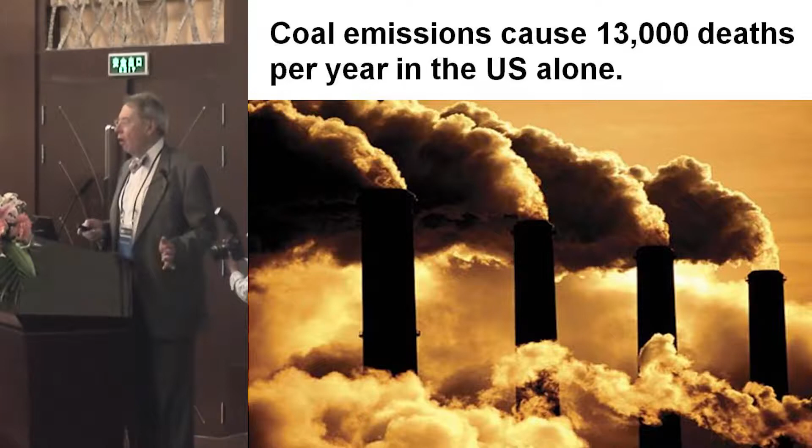First, let's start with coal. The US EPA says coal causes 13,000 deaths a year from respiratory disease caused by inhalation of particles of about 2.5 microns or less. That's in the US alone. In China, over 100,000. The UN estimates in the world, almost 1 million people die from coal particulate emissions.

One of the problems with global warming that I find the worst is the lack of food and water caused by the melting of glaciers. Glaciers normally retain water in winter and release it in summer, but the rivers that are fed by the Rongbuk Glacier are now becoming less able to provide water during the summer. Without water, growing food is next to impossible.

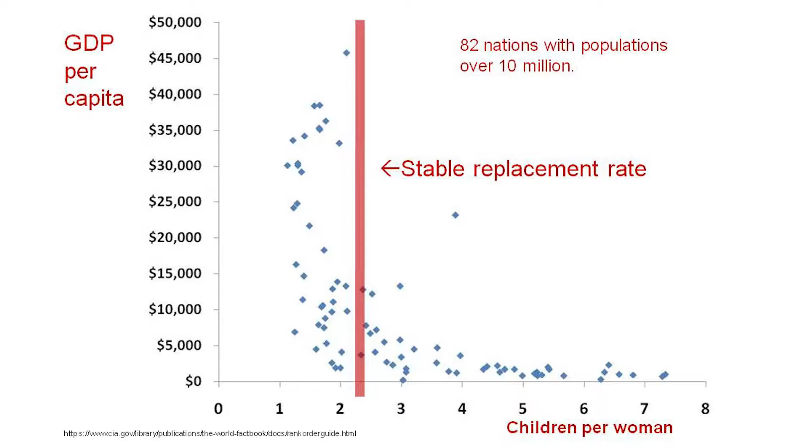Population scientists say about 2.3 children per woman leads to a stable population. And if we just draw that on the graph and look at it, it's the wealthier nations that have a stable or reducing population. The United States birth rate is about equal to that which would cause no growth. US population growth is principally by immigration.

It's pretty clear that somewhere around 2,000 kilowatt hours a year is the break-even point for achieving prosperity using electric power. Now, electric power is not the only way to achieve prosperity. You need education, property rights, rule of law, medicine, and so on.

But electric power is critical to prosperity because it's the type of energy that is necessary for cooling, for heating, for water purification, for sewage processing, for medicine, for communications, for industry, for transportation. All those things depend upon electric power. All the developing nations know this. They wish to increase their energy use.

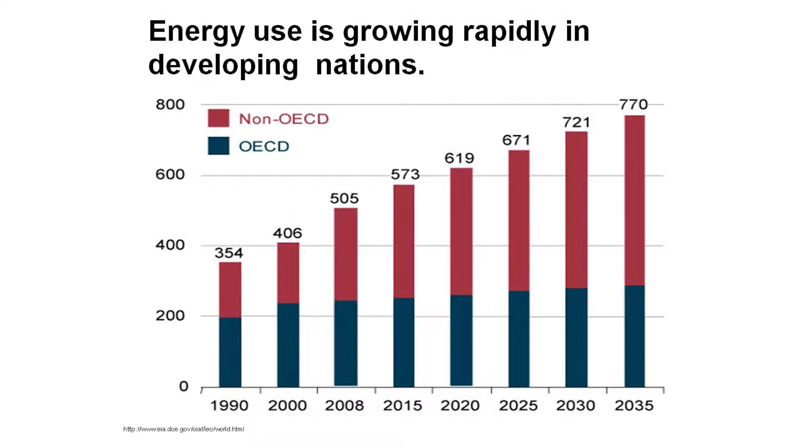And so you see, the non-OECD nations are projected to have the most growth in energy over the next few decades. How are they going to do it? They're going to do it by burning coal, because they don't have money to build $5 billion nuclear power plants. They will use the cheapest energy source available to them because they desperately need that electric power.

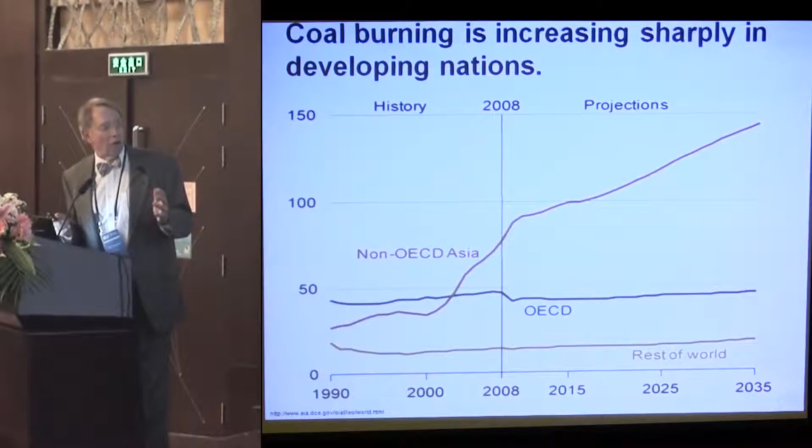Now, carbon taxes. Carbon taxes are not an adequate solution. Here's a man, Jeffrey Sachs, who was the leader of the UN Millennium Development Project. He was also the financial advisor to Poland, to Russia, and so on. He's a well-known economist, and he says taxes aren't enough. We need a new technology. And not only that, we need to have that new technology spread to the whole world rapidly if we're going

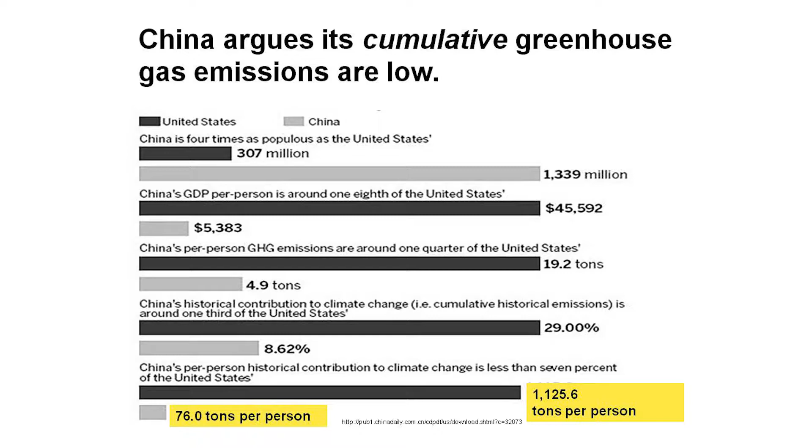And so the developing nations argue that the West gained its prosperity by cheap energy, by burning coal and emitting CO2, so why should the developing nations be denied that right? It's not fair. I'm not trying to make the argument, I'm trying to point out that it's impossible to reach agreement on such a contention.

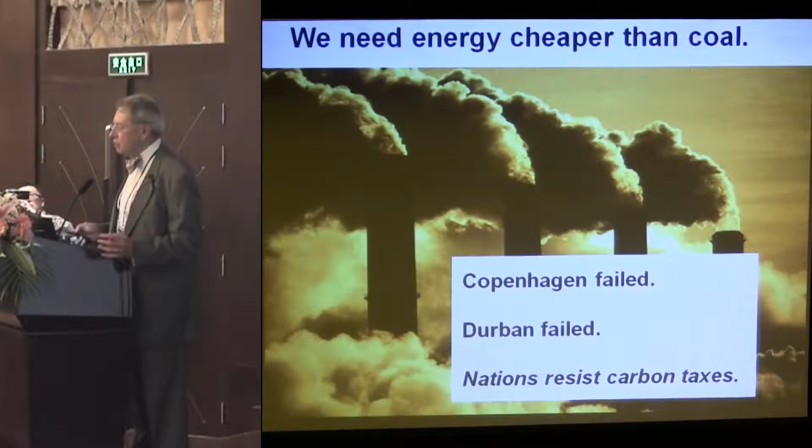So we tried anyhow. We had conferences in Kyoto, in Copenhagen, in Durban. You know, 30,000 people went to the conference in Durban to negotiate a climate treaty. Well, how can 30,000 people agree on anything? How can 7 billion people in 200 nations in the world agree to impose taxes on carbon that is against their individual economic self-interests on behalf of the whole world's stability? It's not going to happen.

So let's look at the cost of electricity from coal and other sources, because there's also a green movement that wants to replace coal. Here's the cost of coal. About $2.8 per watt of generation capacity is the capital cost for coal. In this talk, I use a single model throughout, and I use the financial idea that if you do capital cost recovery at an 8% cost of capital over 40 years, operating a plant 90% of the time, you get 2.8 cents per kilowatt hour. So it's easy to remember, $2.8, 2.8 cents. So that's the capital cost.

The fuel cost for coal is about $45 a ton delivered to the plant. So that adds about 1.8 cents there. So in this model, the cost of coal for a typical US plant is about 5.6 cents per kilowatt hour.

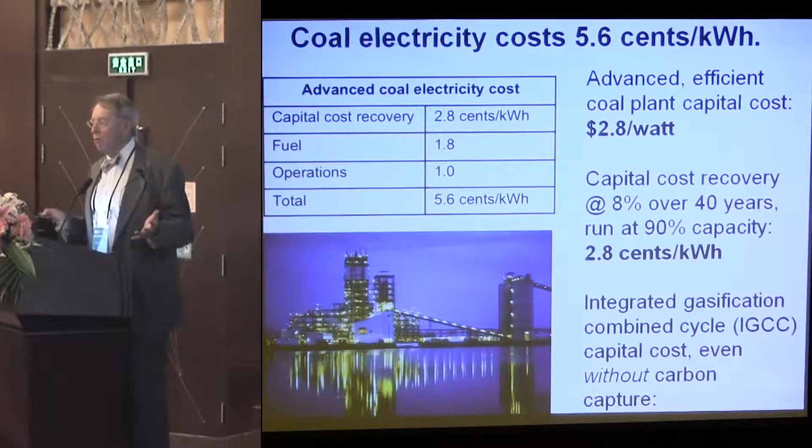Now people are saying, well, we have better technologies like integrated gasification combined cycle plants. These are coal plants that burn coal in oxygen rather than air, so that the effluent is only water and CO2, so the CO2 can be extracted. But only one of these plants has ever been built in the US. That very pretty picture is the one in Florida. And it's expensive.

Natural gas is another interesting energy source. First of all, if you were going to do the best job you could, you would use a combined cycle gas turbine, which has a 60% efficiency of conversion from thermal power to electrical power. Buying such a thing costs about $1 per watt for capital costs. I used fuel costs now at $5 per million BTU to come up with a fuel cost per kilowatt hour of 2.8 cents. Our operations costs are standard in this model, and that comes to about 4.8 cents per kilowatt hour.

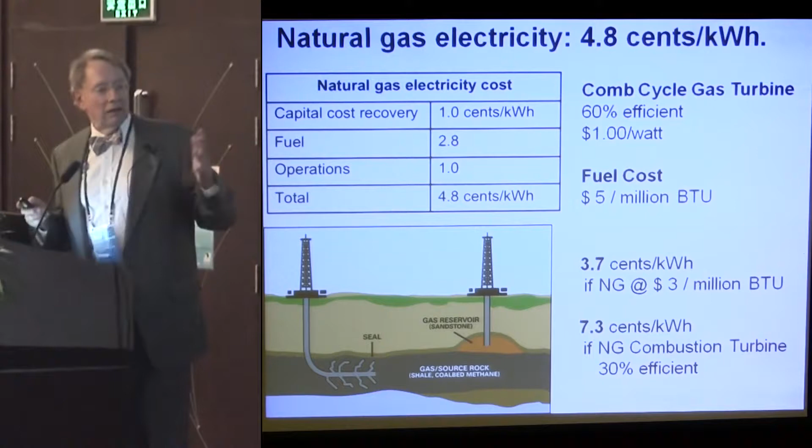Now, on the other hand, the cost of gas right today is a little lower than that. And if that were to persist forever, we could have a low cost of power from natural gas of only 3.7 cents. But actually, we don't use combined cycle gas turbines very much. We only use natural gas combustion turbines. And that would mean it would be about 7 cents. So those are the bogeys we want to deal with.

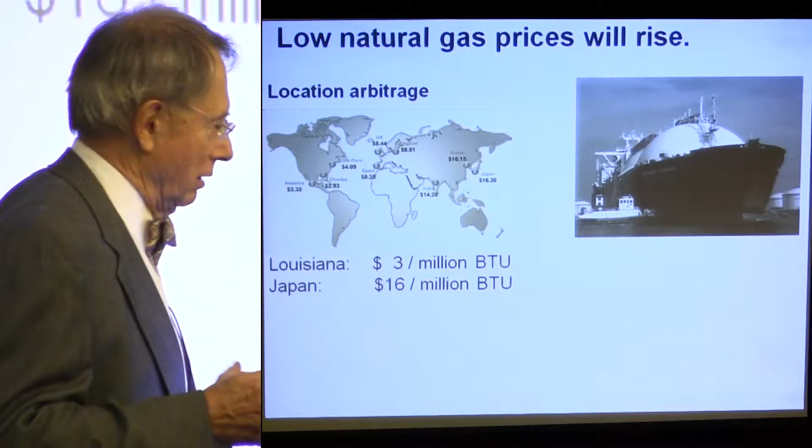Here's the reasons that natural gas prices will rise. Here's the prices of natural gas worldwide. In Louisiana, about $3. In Japan, about $16. Japan is importing liquefied natural gas more and more because they've shut their nuclear power plants down. And it has changed their balance of trade from a positive number to a negative one. So that really can't persist for long periods of time.

Substitution. Just look at the price per BTU of thermal energy from oil versus natural gas. There will be substitution. There'll be more emphasis on flex fuel vehicles. So that's going to drive up demand for natural gas and raise the price. Even the Energy Information Administration of the United States says that it's going to go up. That's why I used $5 in my model.

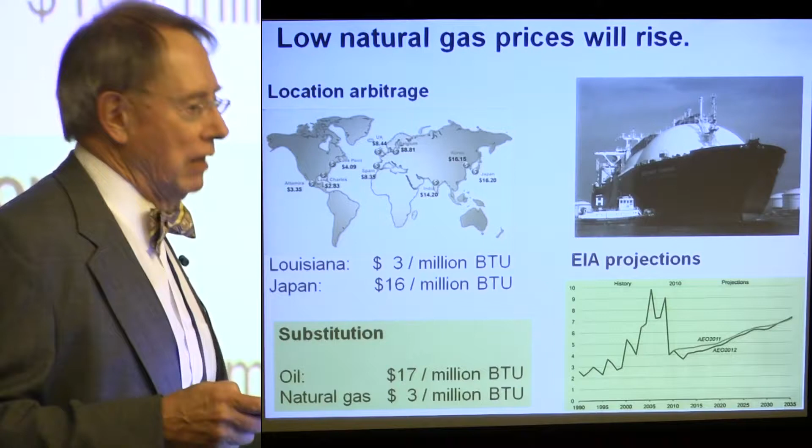Let's look at wind. Wind is integrally tied with natural gas. This number is pretty high, isn't it? Well, the reason is that it costs a lot of money to build these wind farms. It's very hard to find the right costs.

The costs are generally hidden from the public, so the public doesn't know the subsidies. But here are two examples: Deepwater Wind off the coast of Rhode Island, Cape Wind off the coast of Cape Cod, Massachusetts. These are the costs per watt. But those capital investments can only be recovered in the 30% of the time the wind is actually blowing. So the capital cost per kilowatt hour generated is much higher.

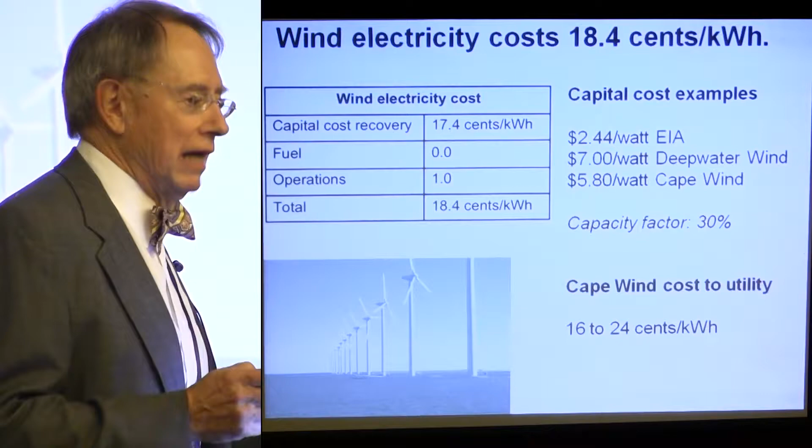It's 17.4 cents. Now, the fuel cost is nicely zero. The ops cost I made the same for all of this model. I got 18.4. I checked that against the real costs, and Cape Wind has negotiated a deal with the state of Massachusetts in which they will sell power at that price. So I say that model's about right. That's how much it really does cost, but they're going to hide that number from the ratepayers.

Now, wind turbines increase CO2 emissions. How can you say such a thing? Let me explain how. First of all, if you had hydropower available, you could use hydropower to back up the wind turbines during the lulls. So if the wind turbine is running 30% of the time, the hydro could run 70% of the time. In most situations, there isn't enough water to run hydro constantly, so you only open the floodgates to run the turbines when demand is high.

So if you had wind turbines coupled with hydro, you could in fact just save water in a sense, not emit more CO2. That's a good pairing. That's the kind of pairing that's done in Denmark with the hydro facilities in Scandinavia. But I want to go back to the two kinds of natural gas turbines. The most common one is a combustion turbine, much like a jet engine. It is only 29% efficient in its conversion of thermal energy to electrical power. But it starts up quickly, in 10 minutes or under, approximately. So as the wind lulls, the natural gas combustion turbine is used to fill in the gaps.

The most efficient gas turbine is combined cycle, and that has a 60% efficiency, twice as good. But it takes a long time to start up, 40 minutes, because not only does it burn gas, but it also has to run the boiler with the output of the turbines. So it's a little more expensive, slow to start up, but a lot more efficient when it's running. So let's suppose for a minute that we were planning the energy economy of a nation, and we said, we have a choice to make.

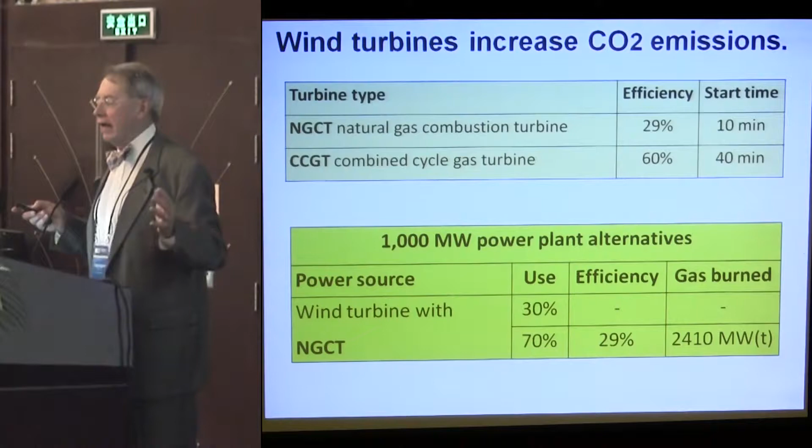One choice is, for a 1,000 megawatt power plant, let's use wind turbines with natural gas backup. Okay, if we do that, then 30% of the time we're not using any fuel, but 70% of the time we're using fuel at a rate of 2,400 megawatts thermal. Okay, suppose I had only combined cycle gas turbines. Well, I'd be running 100% of the time at 60% efficiency, or less fuel. So I deplete my resource less rapidly, I emit less CO2 by not having installed any windmills to begin with.

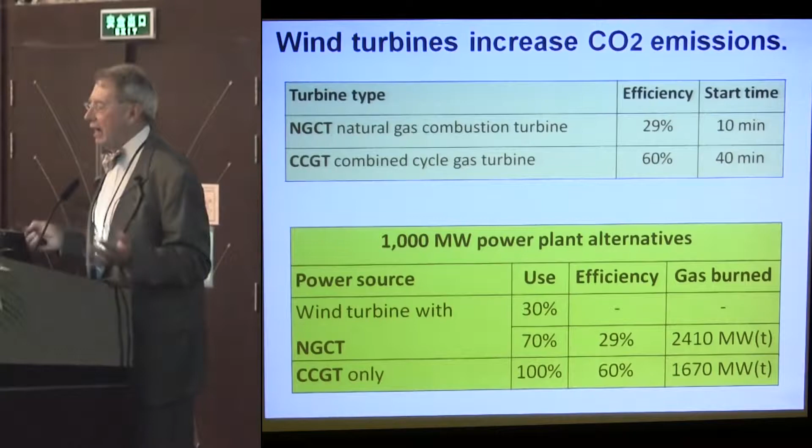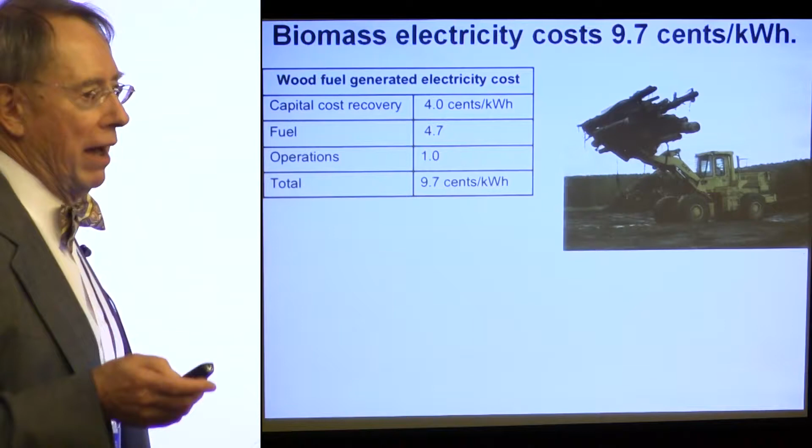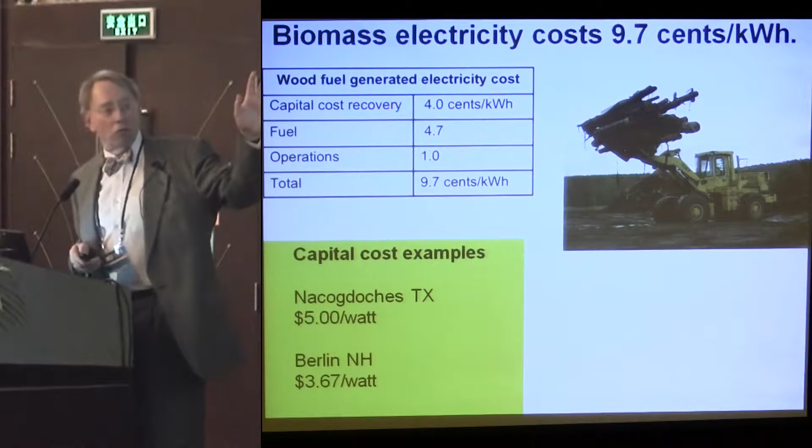Biomass. The cheapest way to use biomass is to burn it. We can talk about ethanol-powered engines and so on, but there's a lot of energy lost in the conversion of the biomass to ethanol. So let's just burn it. That'll give us the best answer possible. Well, capital costs, I looked up for a few plants. I used $4 per watt to build a wood chip burning power plant, and I actually visited one. Capital cost recovery, you see 4 cents per kilowatt hour. Fuel, you have to drive trucks around to the woods to cut lumber and haul it back to the plant, cut it into chips, and burn it.

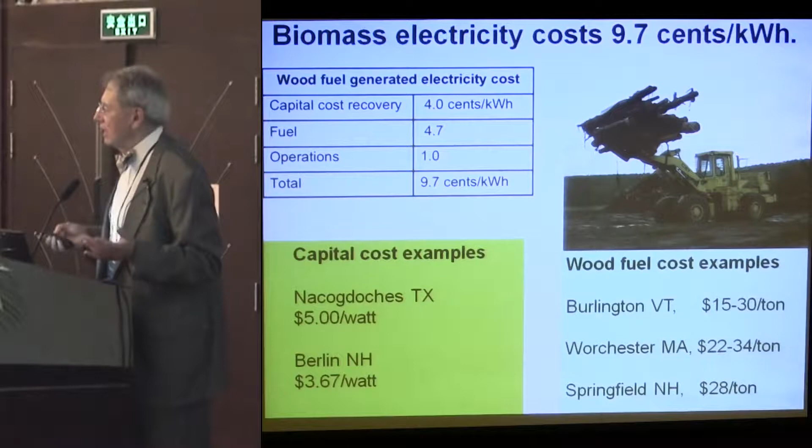And here are the typical costs. I convert those costs in tons to BTUs times the efficiency of the plant, about 9.7 cents per kilowatt hour. Now, you might say, how do wood plants actually make money if they're selling it so expensively? Well, there are all kinds of, again, rules in the United States, at least, about getting green energy credits that are marketed, renewable energy credits, to make it possible to do that.

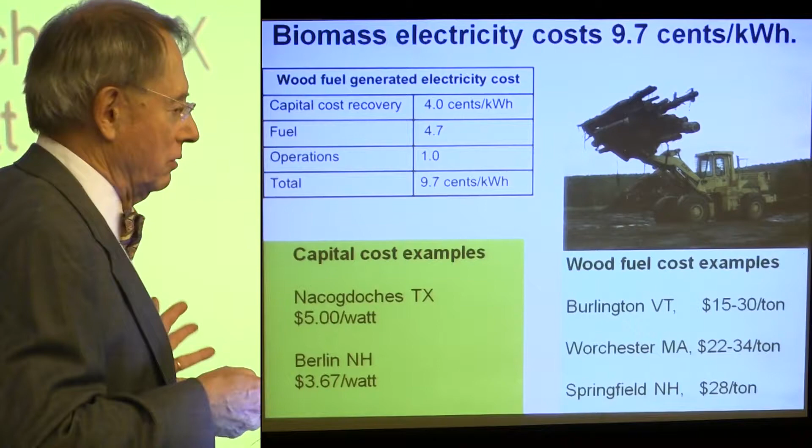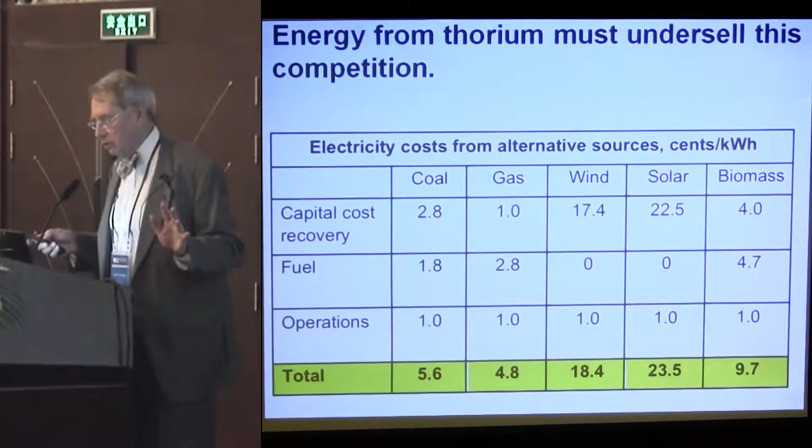So, if we want to save the world by underselling coal, here are the numbers we have to beat. And we might have to go as low as 4.8 cents for gas if, in fact, the gas prices never do rise. That's the bogey. That's our objective. Undersell those numbers.

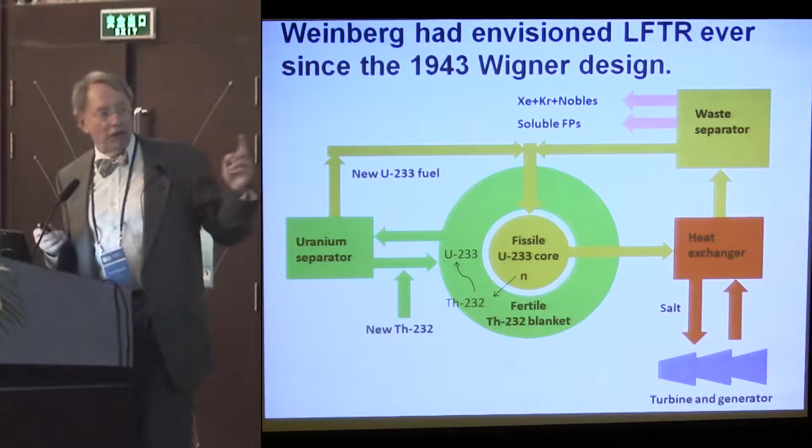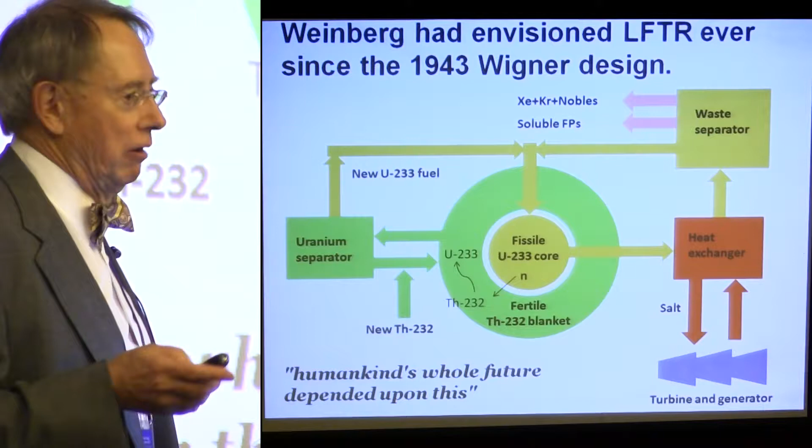Can we do it? Everyone in this room probably knows already how one of these liquid fluoride thorium reactors works. In this example, it's a two-fluid reactor that is fed simply by thorium, and it's sort of idealized, and it continuously processes the nobles, which are relatively easy to get out, and the fission products, which are harder to get out. Weinberg thought that the world's future depended upon such an inexpensive energy source. Weinberg himself wrote about global warming from CO2.

There's an intermediate step that could be equally effective, a lot less expensive, the denatured molten salt reactor that actually does not bother to process the dissolved fission product fluorides, but simply leaves them in the salt for 20 or 30 years until eventually they have to be reprocessed or perhaps just dumped and started all over again.

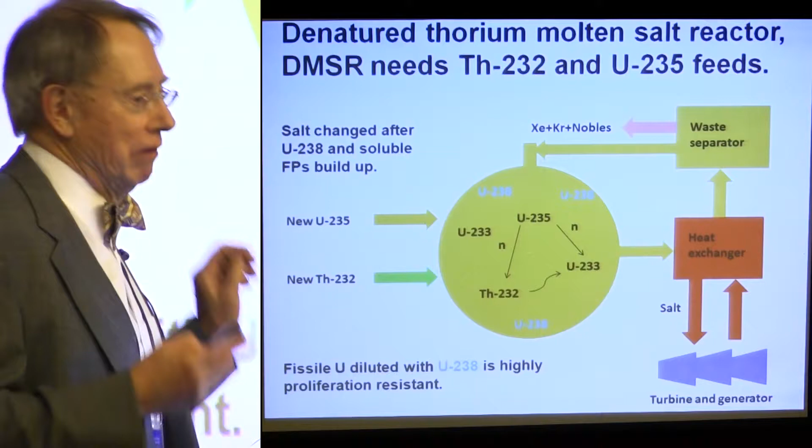In this example, it's fed with U-235, probably diluted in U-238 at a 20% level, and that works. Oak Ridge built one of these without the U-238. They ran it on U-235. They ran it on U-233. The advantage of U-238 is that this kind of reactor is probably the most proliferation-resistant reactor that you could scheme up.

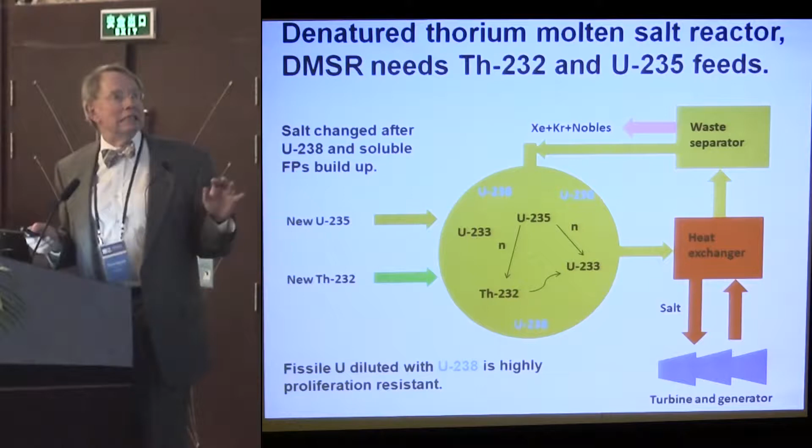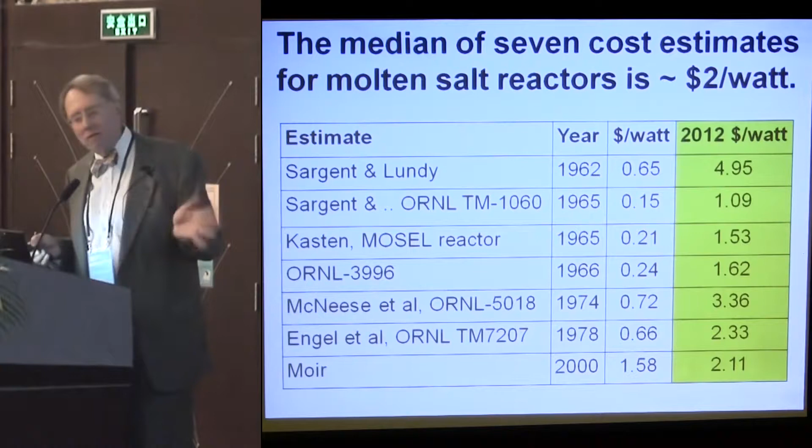Wow. Can thorium energy be cheaper than coal? That's what I want you to learn. The answer is, here are 7 proposals over the years to build molten salt reactors. And you can see $2 is a reasonable number for a target. These are real proposed numbers, inflated to current dollars.

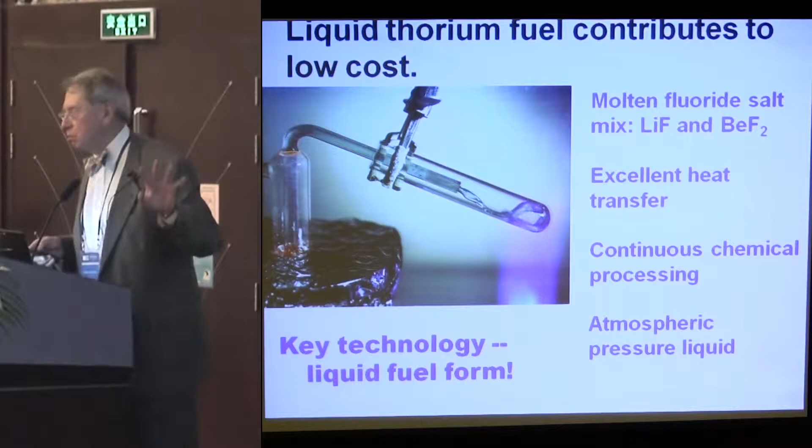The reason this technology is potentially inexpensive isn't the thorium so much, it's the liquid fuel form, because it has excellent heat transfer, allows continuous processing for fuel additions and efficient product removals. It's an atmospheric pressure liquid, so containment is much simpler. And it's a room temperature solid, so if there's a problem, the particulates or the fission products and so on don't necessarily escape so easily into the environment.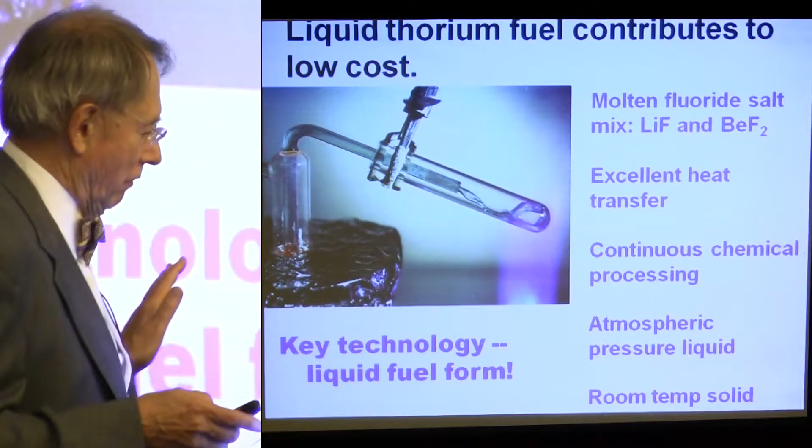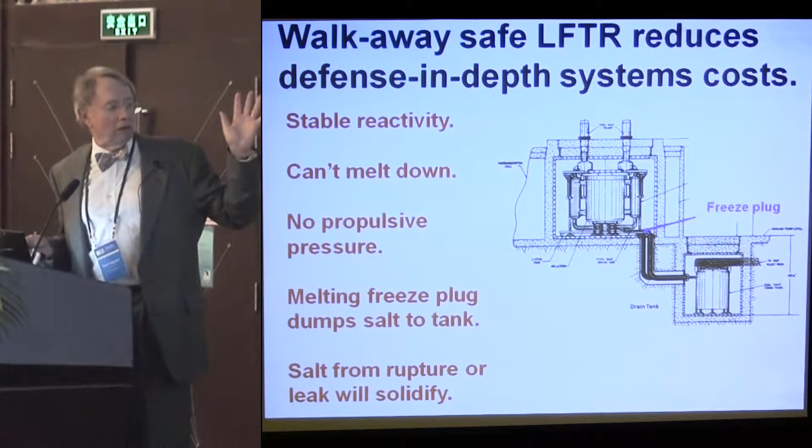The safety systems also contribute to the low cost. The reactivity is stable, makes it simple to control. It's a thermal reactor, unlike a fast reactor. There's no meltdown concept. It's as hot as it's going to get. There's no propulsive pressure to push reactive materials into the environment, and so on. There's no large containment dome. That saves money, saves mass.

Let's look at the waste product for a minute. Here's the process for converting Th-232 to U-233 by neutron absorption in a nuclear power plant, in particular a liquid fluoride thorium reactor. And if you were to let that go, eventually, by more and more neutron absorptions, you could actually get up to plutonium-239 and perhaps the higher level actinides. But compared to a normal light water reactor, it takes 6 more neutron absorptions, so it's much, much less probable to generate any of that long-lived, high-level transuranic waste.

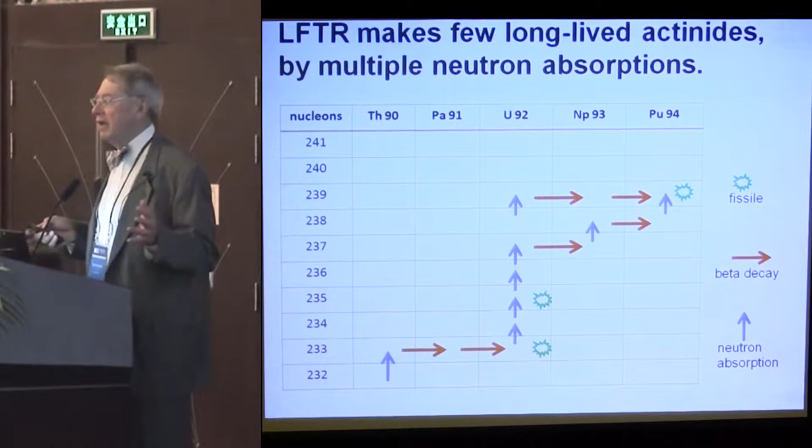On the other hand, if you had U-238 in the mix, okay, that's 1 neutron absorption, and there you go. So that's the difference. These kinds of reactors, if you leave the actinides in solution, can slowly get rid of them by absorption and potential fission. It's not as good as a fast reactor, but such a reactor can consume much of its own actinides that are created.

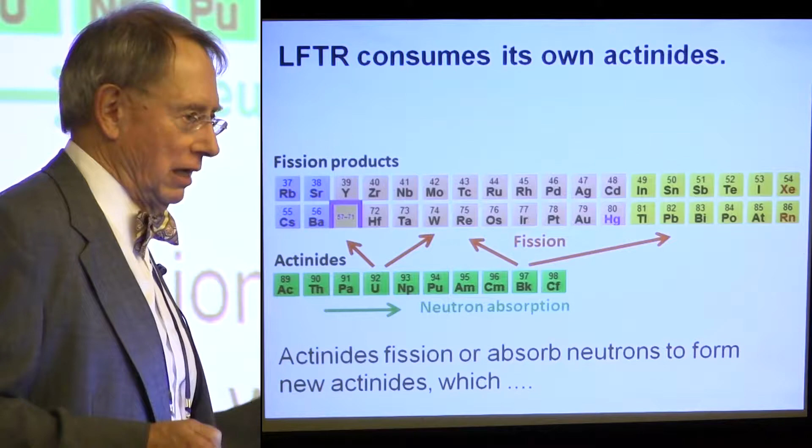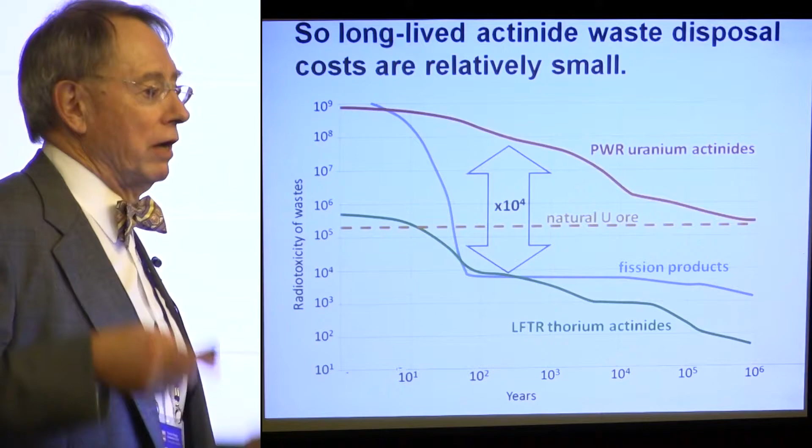And the end result is, although the fission product waste for all kinds of reactors is about the same, and it has to be dealt with very carefully for 200 or 300 years, the long-lived actinide waste, at least from a liquid fluoride thorium reactor, is about 10,000 times less.

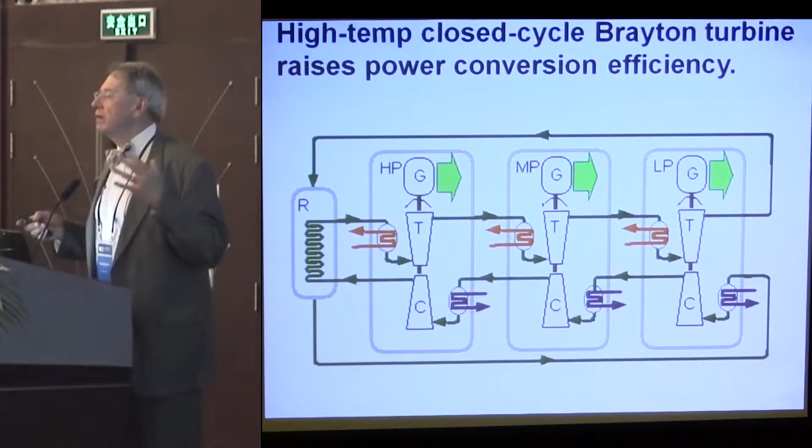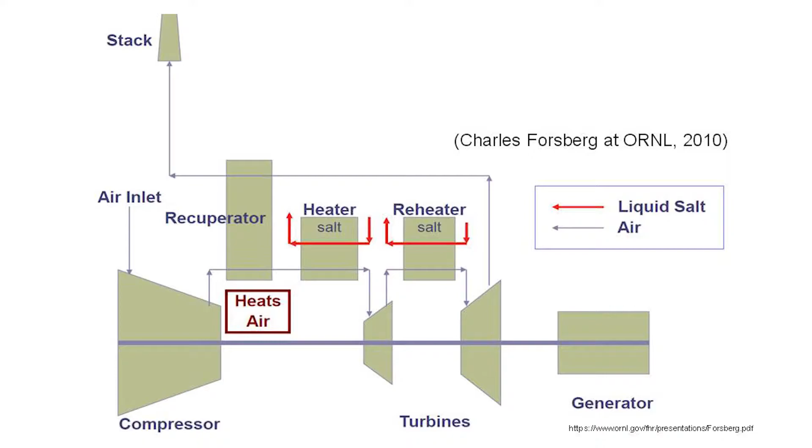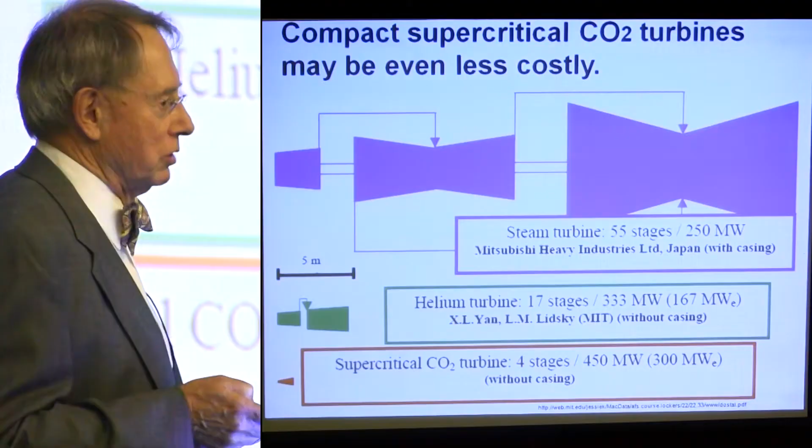And you can see on the diagram, the little red turbine on the bottom is meant to represent the expected mass of the supercritical CO2 cycle. So that's another reason why this can be less expensive. And of course, thorium fuel itself is pretty inexpensive.

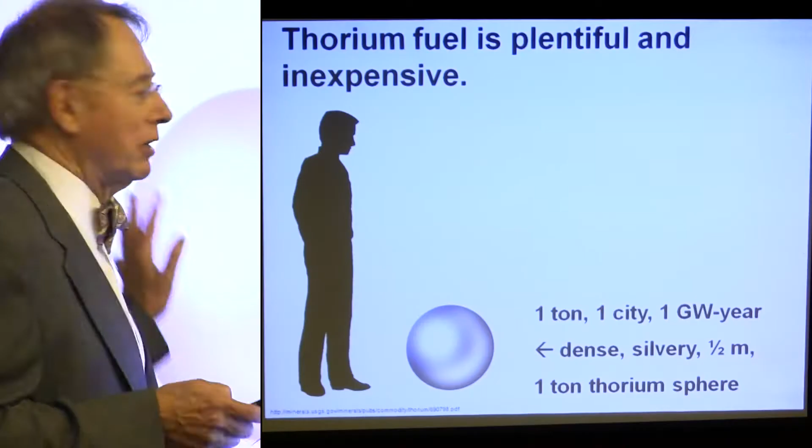Here's a 1-ton ball. That's about the right size of it. You could put it on your pickup truck. You could run the city of Boston for about a year. You could run the entire US on 500 tons. The government has 1,500 tons in storage, just sitting around in the desert. There are millions of tons available worldwide, and there's enough thorium in every country that each country can be guaranteed some level of energy security. They can't be blackmailed by saying we won't give you the fuel.

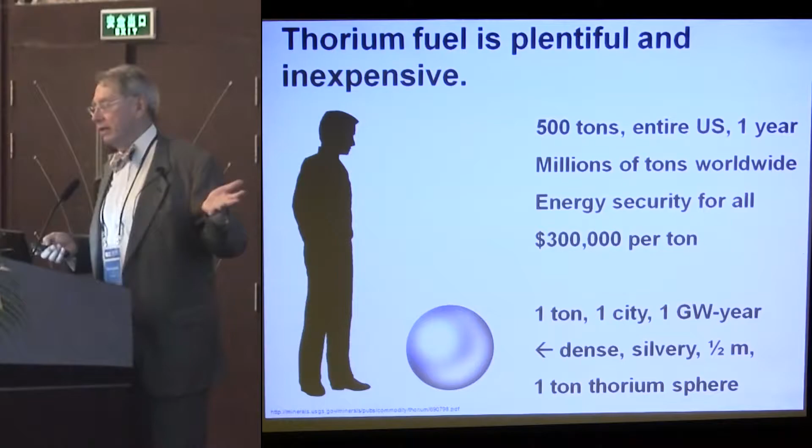It's pretty inexpensive. Let's look for a minute at the idea of mass production of small modular reactors. My model here is Boeing aircraft. They can produce a $200 million unit every day. And aircraft manufacturers have the same responsibilities as nuclear power manufacturers. They worry about corrosion, material fatigue, they worry about quality control, CAD, CAM, computer-aided manufacturing, all those kinds of things. Why can't we produce nuclear reactors the same way?

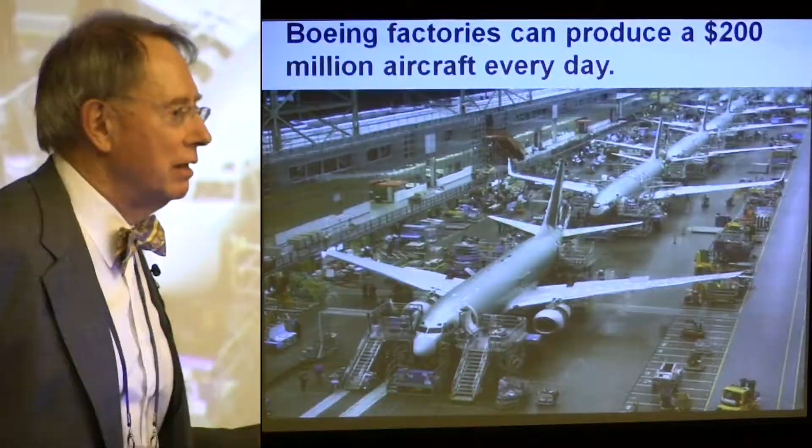Then we get the benefit of what's called the learning curve in manufacturing. This is not a theorem, but an observation that every time you double the number of units produced, the average cost drops by something called the learning ratio. In the early aircraft industry, it was about 20%. In the IT industry today, it's about 50%. The University of Chicago postulated it would be about 10%, which is pretty conservative, for the nuclear power industry. That's if we do mass production of essentially the same units. So look at that. We can drop the cost to 40% or so after 1,000 units of production.

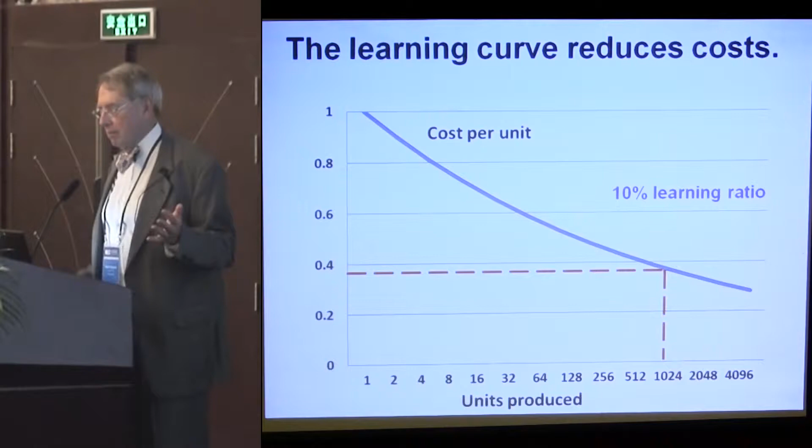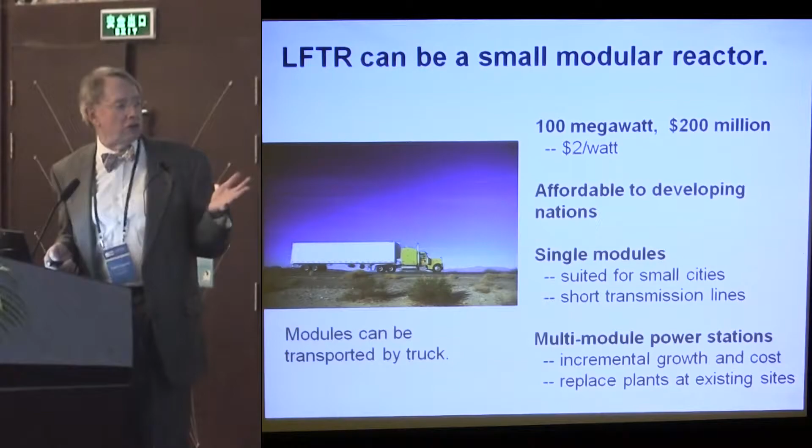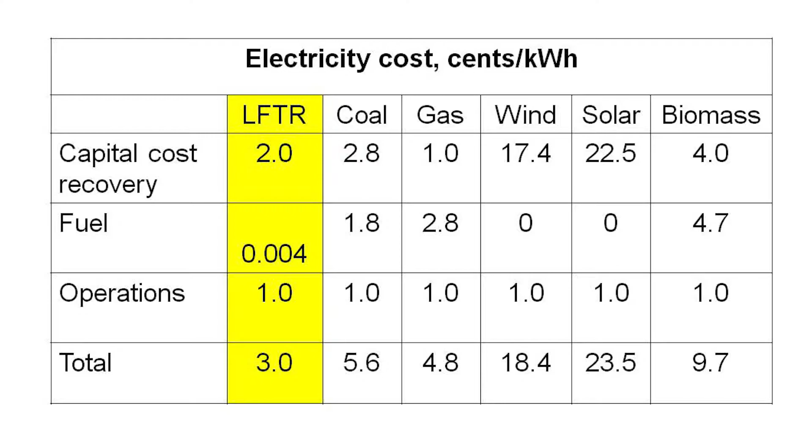So I say, learn to develop small modular reactors at about $2 a watt, about the cost of an airplane, $200 million. Make them affordable to developing nations that can't put in a $5 billion reactor. We can use small ones near cities. We can gang them together for bigger power stations. We can allow them to be truck transported. If we do all that at $2 a watt, the cost of fuel is nothing. I use the same number for operations as before. We can hit 3 cents per kilowatt hour, and we can undersell all the competitive technologies.

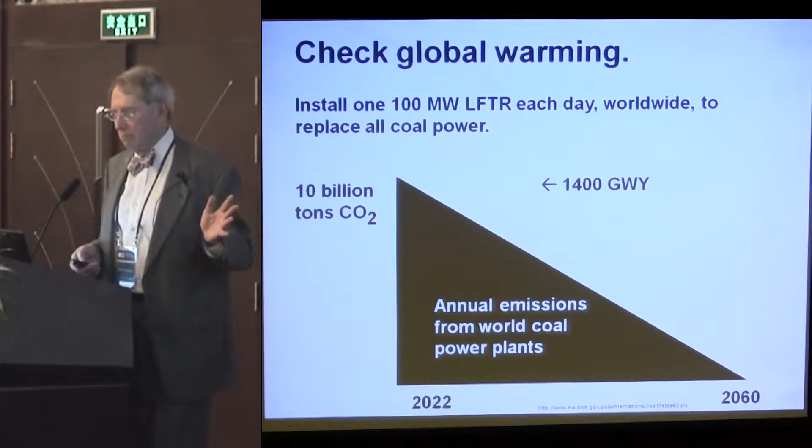If we do this, then we can create a new industry. I'm advocating about $1 billion investment in the development stage for R&D that becomes public domain, another perhaps $5 billion of industrial investment to develop the production capabilities, and then the process of producing and exporting one a day. What if we do that? What will happen to the CO2 emissions? We could eliminate in 38 years all the coal plant emissions, all of them. All we need to do is produce one a day.

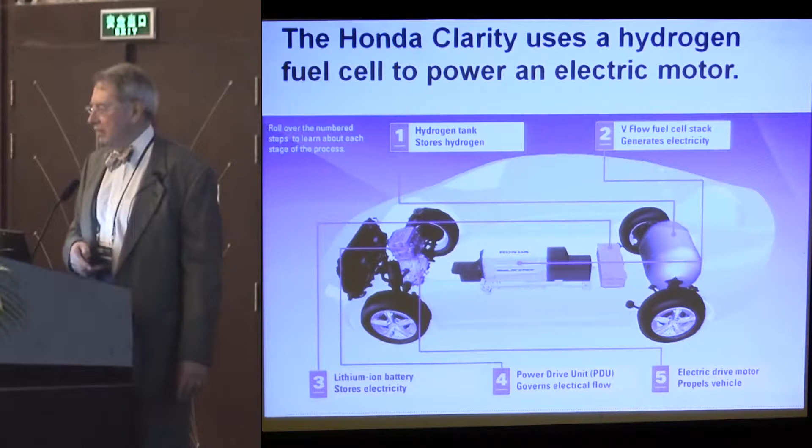Having solved that problem, what do we do about fuels for vehicles? With only 650-degree heat, we can get about 45% efficiency, conversion from thermal energy to chemical potential energy for burning hydrogen. There are actually hydrogen cars available. The Honda Clarity can be purchased in Florida today if you live near one of the dozen or so hydrogen fueling stations. So they do exist. Ford Motor Company did an internal combustion engine with hydrogen.

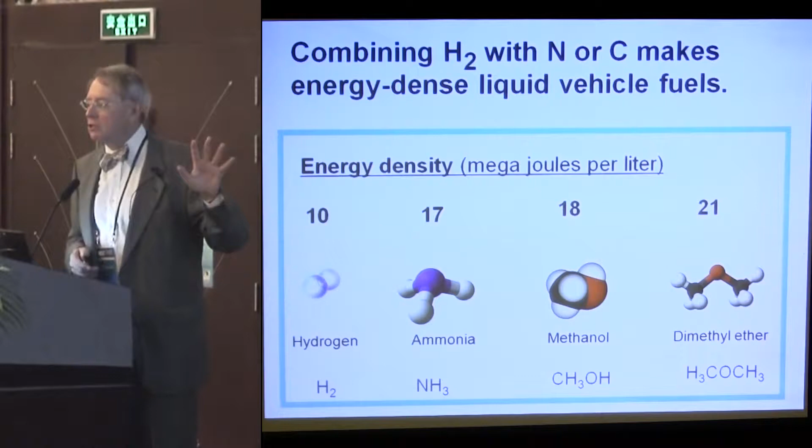But hydrogen is not an easy thing to deal with. For one, you have to compress it or liquefy it in order to carry it on board a vehicle. And even when you do that, it's not nearly as energy dense as these other kinds of fuels: ammonia, methanol, which is a gasoline substitute, or dimethyl ether, which is a diesel substitute. So let's think about carrying that hydrogen with carbon and nitrogen. First, look at ammonia for a minute.

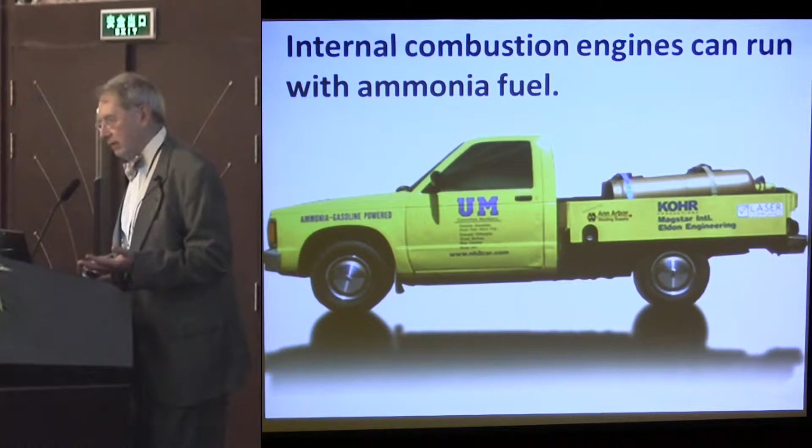More than 1% of the whole world's energy is used to make ammonia. It's used principally as a fertilizer. A third of the lives on Earth depend on food that's grown from ammonia produced this way. And it's produced now from natural gas. But we can also use ammonia to fuel an internal combustion engine. This is a University of Michigan experiment. There's a guy in Canada who has a car that runs on this. It's certainly possible.

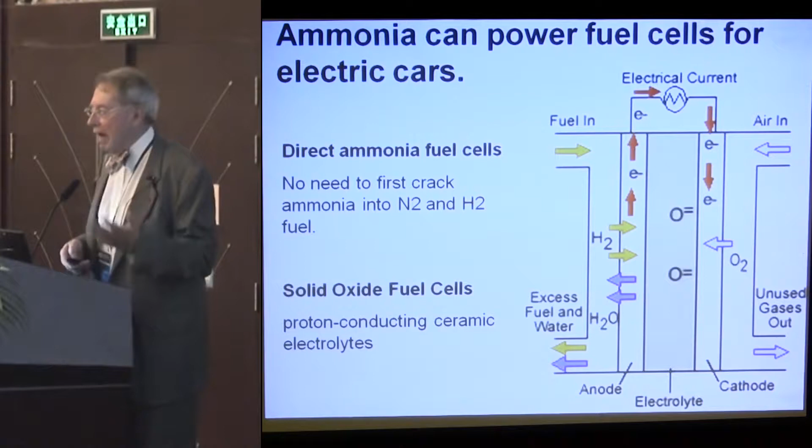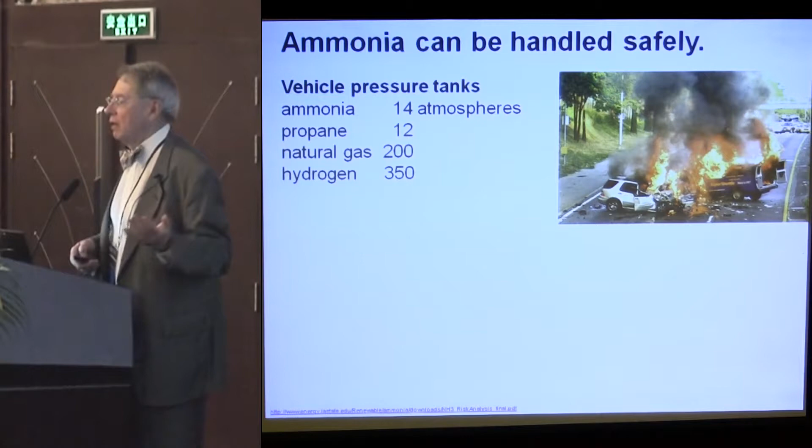You can even use ammonia to run fuel cells. These solid oxide fuel cells are sort of laboratory scale now. There's no industrial capability to do these kinds of things. And ammonia really can be handled safely. People say, oh, it's poisonous. Well, gasoline is explosive. You have to look at what all the risks are. And here's some examples. We'd have to pressurize it to about the level of a propane tank. Natural gas and hydrogen are pressurized to much higher levels. There is a spill danger, but you can smell it.

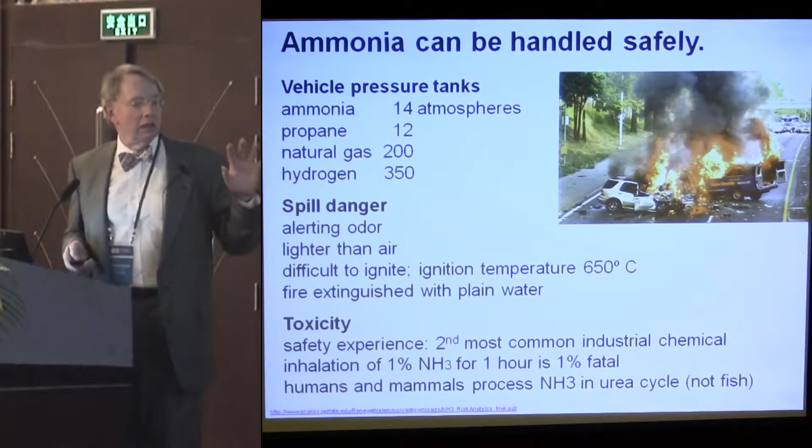It's difficult to ignite. It is toxic, so you don't want to breathe concentrations of it for a long period of time. There's no low-level toxicity risk because the human and mammalian cycles naturally excrete urea. It is toxic to fish, so you have to be careful. There was a report done in the Midwest comparing the risks of ammonia and gasoline fuels, and although they're different, they're about the same.

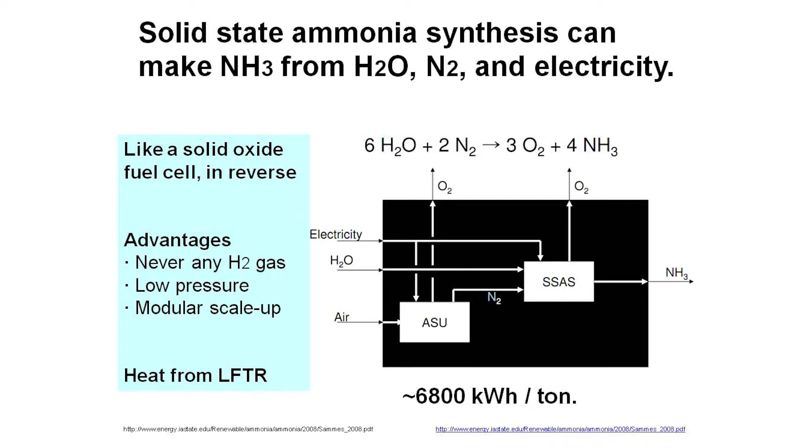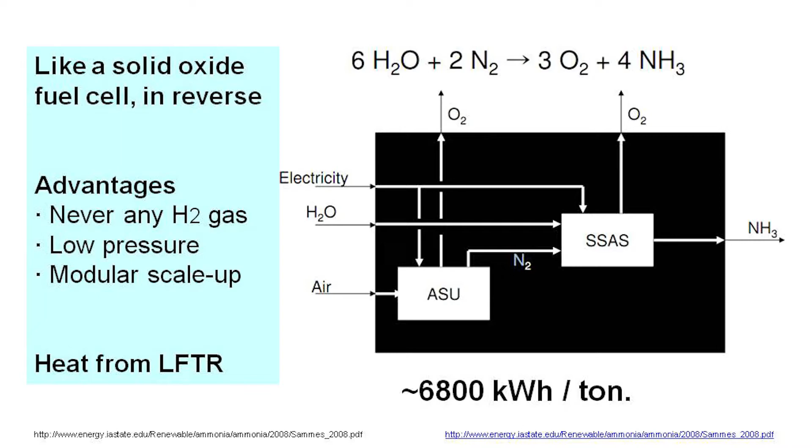Now, we can make ammonia from solid-state synthesis. It works kind of like that solid oxide fuel cell in reverse. Again, lab scale. NH3 Fuel Association did some papers on this. They estimated, and we adopted it, about 6,800 kilowatt hours of electric power are consumed per ton of ammonia produced by this process. It helped a little with extra heat. Suppose we did that at 6,800 kilowatt hours per ton.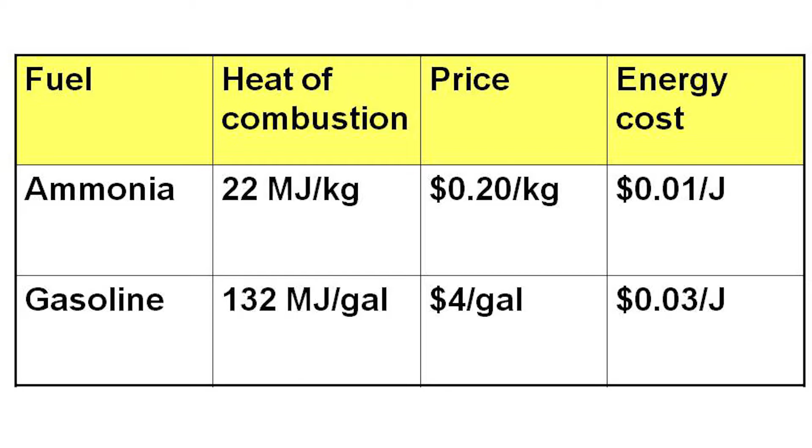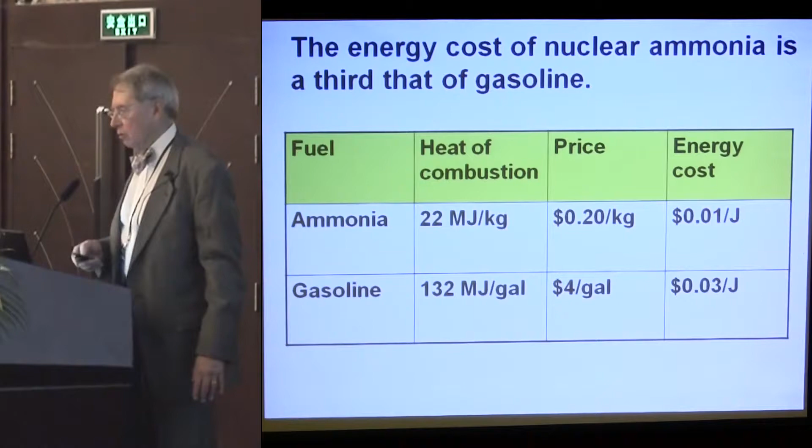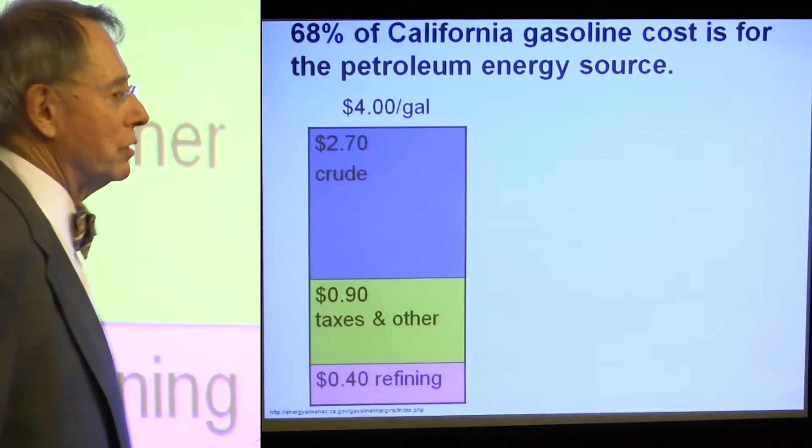Translate that into costs. That's about a penny a joule for energy from ammonia produced that way, whereas today's gasoline is about 3 cents per joule. Remember, a joule is a watt second? Then I looked at the California state analysis of their gasoline costs, and more than half of them are from the crude oil that goes into the gasoline. So I say, well, that's the energy content. The taxes and distribution, refining, those are all going to be the same.

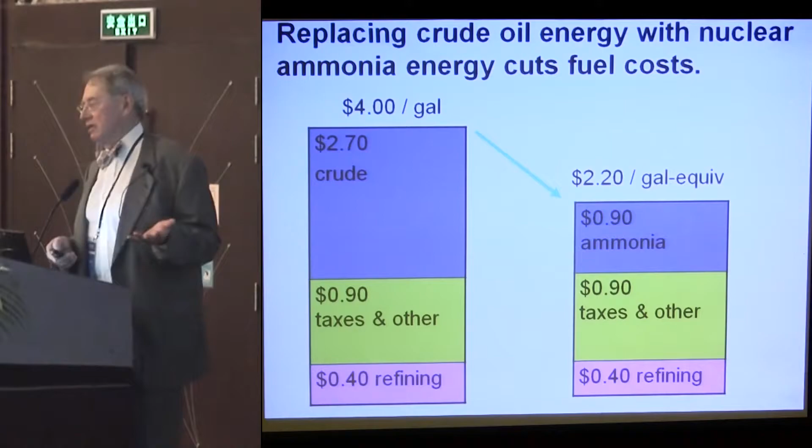Suppose we used ammonia. What might we get? Well, we might get a third of that cost because it's only 1 cent instead of 3 per joule, we could reduce the cost of the gasoline equivalent. Now, I'm making the leap of faith that engineers can create refineries that can produce this kind of ammonia fuel as efficiently as do today's petroleum refineries.

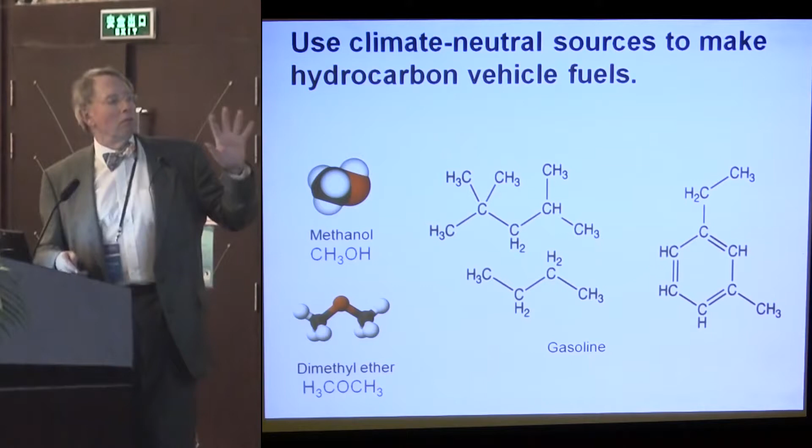Well, suppose you don't like the hydrogen and you don't like ammonia. We have to go back to carbon, but we don't want to take it out of the ground. What are the sources for carbon that do not pollute the atmosphere more? We like to make these kinds of chemicals. One is the project called Green Freedom, which was done at Los Alamos, never done, just designed. And the idea was to use a liquid in the cooling tower of a nuclear power plant that was saturated with sodium bicarbonate. When sodium bicarbonate is heated, it exudes CO2. That's how baking powder works in your kitchen. So you can capture that CO2.

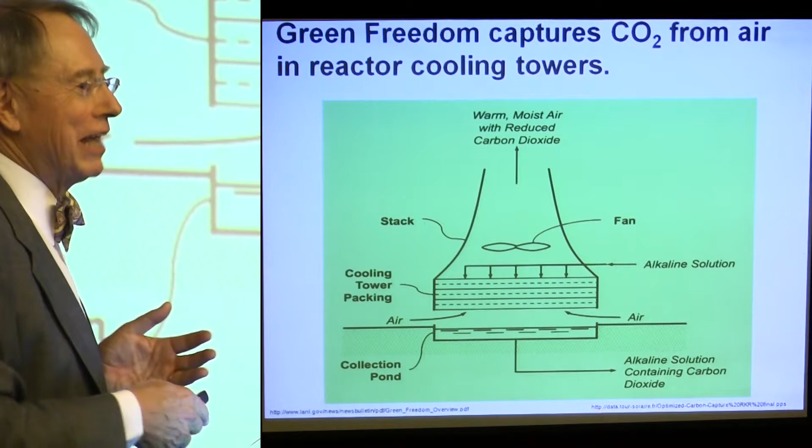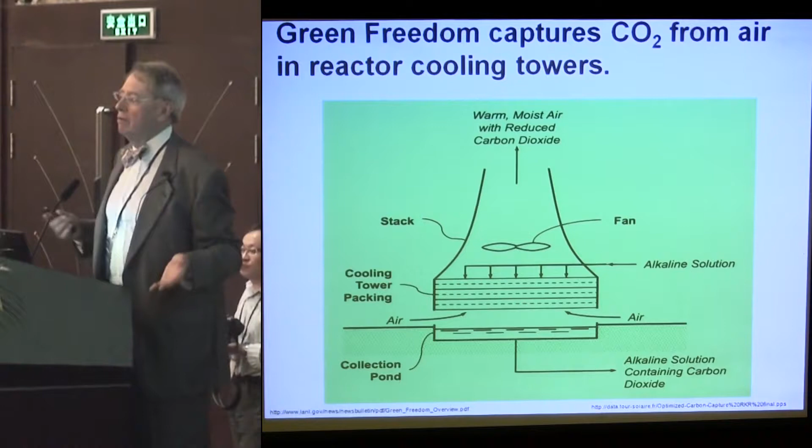A guy named Jim Holm in the thoriumapplications.com website has another scheme using the cooling canals of a nuclear power plant, such as the one in Florida, to do the same kind of thing. So that's a potential way to do that. Of course, we can also do that by getting carbon from agriculture. Now, farming produces about 3 tons of dry biomass per acre per year, no matter whether it's switchgrass or corn or trees. And about half of that is carbon.

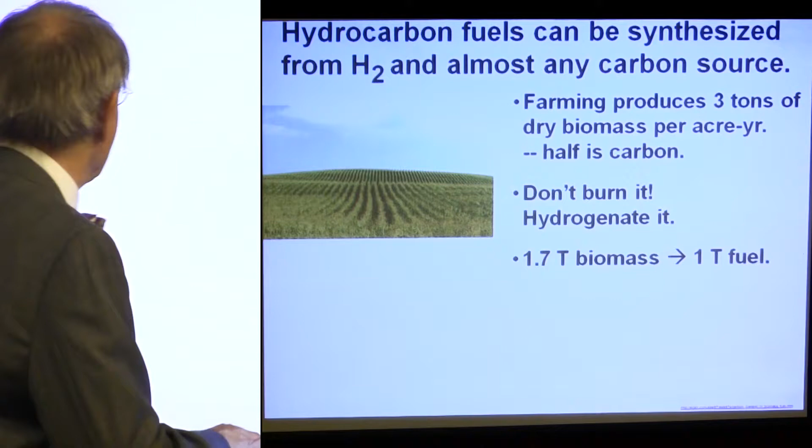But let's not burn it. Let's not do what the ethanol people do. Let's use the carbon in it to be the carbon that's going to go into one of those hydrocarbon fuels. We'll add hydrogen to it in order to create the fuels. We'll get about a 3-to-1 fuel improvement ratio doing that. About 1.7 tons of biomass would yield a ton of fuel. U.S. farmland is about 1 billion acres. We use already about 1 billion tons of fuel a year. We'd have to reduce that a lot in order to be able to satisfy our fuel appetite in the U.S.

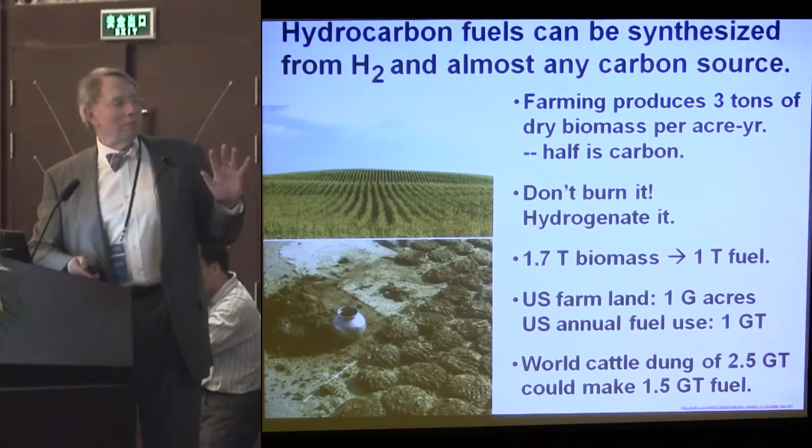But on the other hand, if we didn't burn coal, we wouldn't have so much diesel fuel burned in trains. Half of the train traffic in the United States is hauling coal to power plants. We can electrify the rest of the railroads. We can do better. So we might be able to live with that source. Cattle dung is burned in a lot of countries for fuel, but it's a source of carbon. Same thing. World cattle dung is about 2.5 gigatons per year. That could make a lot of fuel if we could collect it. So there are other sources of waste hydrocarbons that we can consider as sources to make carbonaceous fuels.

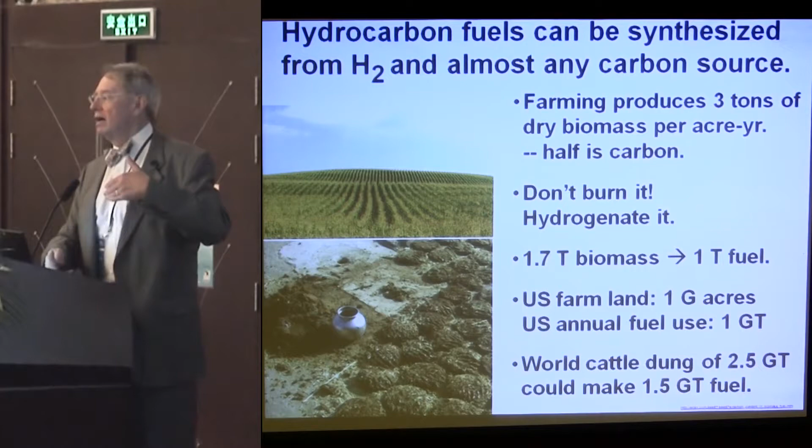In summary, I say, try and develop this technology. And I advocate public domain ownership of the R&D of the first 5 years. Produce and export it. Zero out coal plant CO2 emissions. Synthesize climate neutral fuels. Avoid the contentious carbon taxes that mean that meetings such as Durban never succeed. Improve world prosperity by raising people out of energy poverty and that checks the overpopulation growth.

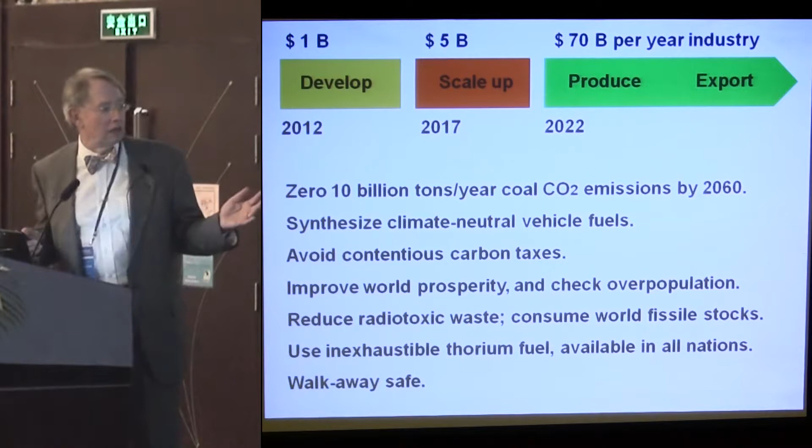Reduce the radiotoxic waste from the existing things and use the world fissile stocks of excess weapons grade plutonium and U-235 and so on to help start up these reactors. Use inexhaustible thorium fuel, which is available in all nations, giving energy security, and create a walk-away safe reactor. Again, cost is the important thing.

We need to have energy cheaper than coal. The designers of that reactor are probably in this room. So I ask of you to remember there's a tipping point here. If you have energy cheaper than coal, we can solve that world climate and population problem because it will be in the economic self-interest of 250 nations to buy those cheaper power sources rather than burning coal. If we don't make that and people find that they want to continue burning coal, then we'll have the scenario that was outlined by Dennis Meadows and the Club of Rome.

Thank you, Robert. This is Bob Cywinski from the University of Huddersfield. Unless I missed it in your talk, you didn't give a comparison of the cost of electricity from a molten salt reactor with that of conventional nuclear, nor a comparison with the cost of using thorium, for example, in more conventional nuclear reactors. I just wondered if you could comment on that.

We know the capital cost of a conventional reactor is about $5 per watt today, and the cost of fuel is trivial. So a typical uranium reactor today is competitive with coal, hydro, natural gas, about 5 or 6 cents a kilowatt hour. So it is a valid and reasonable source of power today. Thorium has been used to sort of enhance the lifetime of the fuel rods in previous reactors, and I see no reason why that wouldn't work as well.

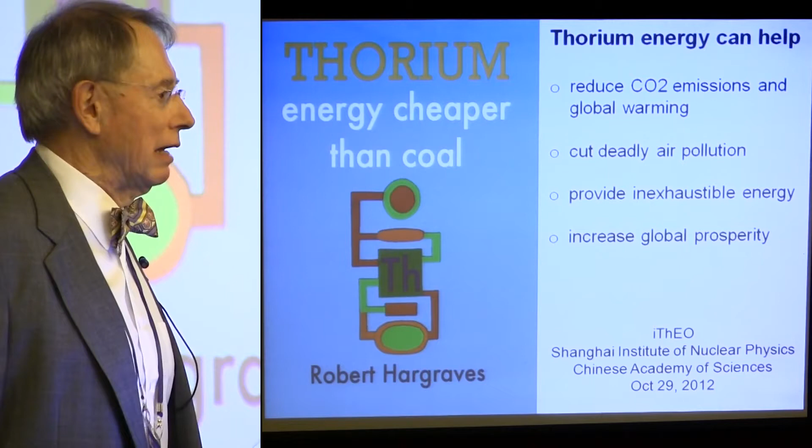I was looking at the cost for a LFTR reactor, for a thermal molten salt reactor. As far as I'm aware, that really breaks down into the cost of building the reactor and building the reprocessing. And I was wondering if you had any figures of the ratio of those costs. The best I could do was to find those examples I showed you. I don't think we can get a really good cost estimate until we have a really good design, to be honest. I think, however, that the single fluid reactor is bound to be a lot less expensive, and it's probably going to be the first to market.

That was a fascinating talk. It's Bryony here at the front. I would just say, though, that I think the second half of your presentation gave me great hope and was really fascinating. The first half, where you talk about the costs of renewables, I don't see this as a competition between renewables and nuclear. I think they can be complementary and work together. And the reason we're paying a high cost per kilowatt hour at the moment is because we want to exactly do what you've suggested and have that learning curve development. More deployment, costs come down, and you find different ways of integrating it into the grid. So I just would say, let's try and create a big tent here. Let's try and work together. All low carbon sources should work together, and we've got to beat coal.

I think the future for renewables is very bright, and some of my question, I suppose, is, what do you think about the integration of intermittent sources of renewable energy with storage systems such as heat stores, thermal stores being used in homes and businesses, which is what they're doing in Denmark now?

We should allow renewables to try to compete in this market, but we shouldn't hide from the public the true cost of what's being paid. So in the long run, we need to cut down the subsidies, particularly for ongoing production costs of electricity. The holy grail for renewables is to be able to store the electric power one day and use it the next. And it's very expensive. The only practical ways, and they're not very practical, that I've seen that work at all, are pumped hydro and underground compressed air storage. But both of these lose some energy. The costs of batteries for storing basically move the decimal point over 1 when you're trying to look at the cost of electric power.